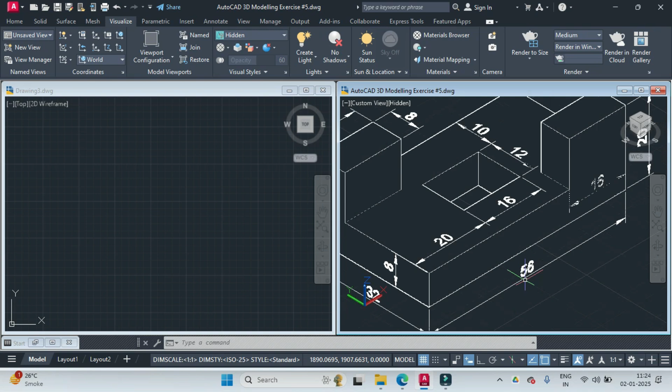So let me show you how we'll proceed with the rectangle. So first we'll draw a rectangle of 32 by 56 units. In the top view, we go to Home, select rectangle, and draw one rectangle. We give the length as 56 units and the breadth as 32 units and hit enter. So this is our rectangle.

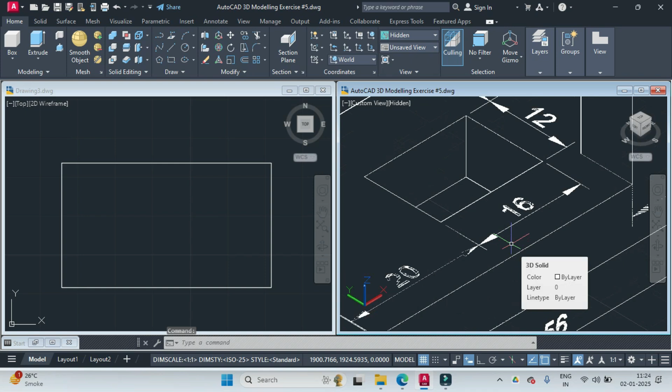Now we have to draw that inner small rectangle, and the dimensions for the inner small rectangle are 16 by 12. So again we use the rectangle command, and anywhere inside this we draw a rectangle of 16 units, press tab, 12 units, hit enter. Then we move it. We select the move command, click on the object to move, click on the center, and then move it to the geometric center of the upper big rectangle.

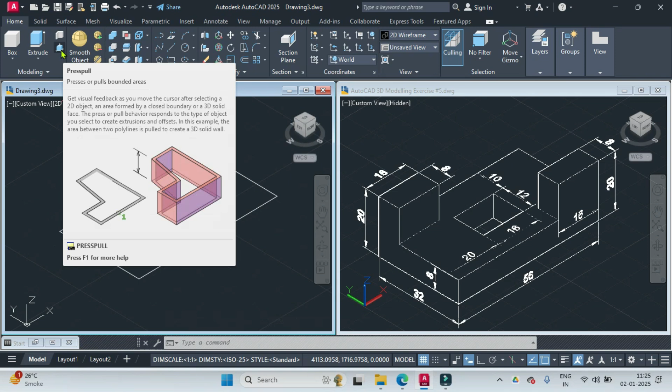Now we go into the southwest isometric view by clicking on this home icon. Now, using the press pull feature of AutoCAD, we are going to give it a thickness of 8 units. So first we'll click on this 2D wireframe and select shaded with edges, and then use the press pull feature, click over here, give a thickness of 8 units and hit enter.

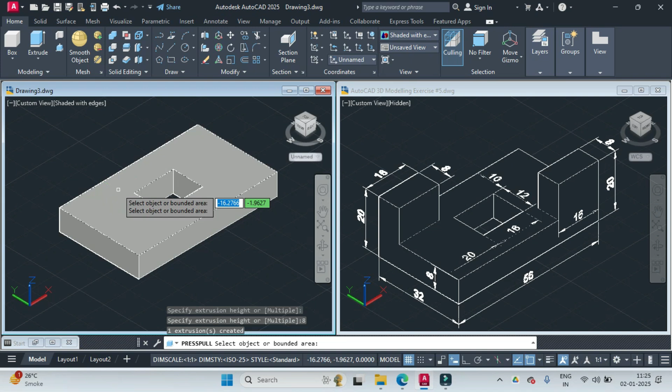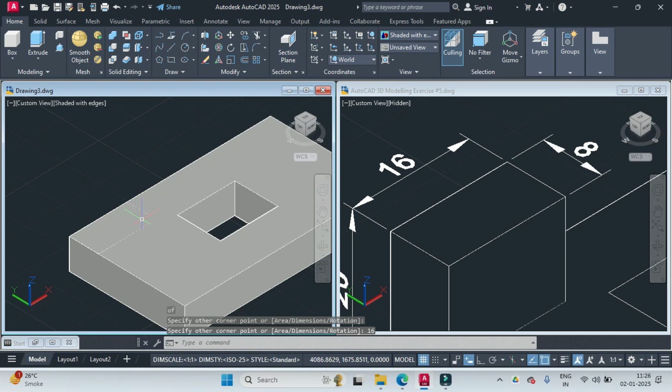Now we'll draw this upper rectangle which is 16 units by 8 units, and we'll draw that in this area over here. So again we use the rectangle command and click over here. You can type end, so you go to the proper end of this rectangle, and now you can give the distance for the rectangle. So we want it 8, we press tab, and 16 and hit enter. So the rectangle is now ready.

Now we have to extrude it to a distance of 20 minus 8, that is 12 units. So we use the extrude command, and here you can type L, so it selects the last object, and then we give a thickness of 12 units.

And now we have to copy this object over here. So CO for copy. We click on the object to copy, click on the base point. So we select end point, click over here and move it to the end point over here. Then press escape and our geometry is now complete.

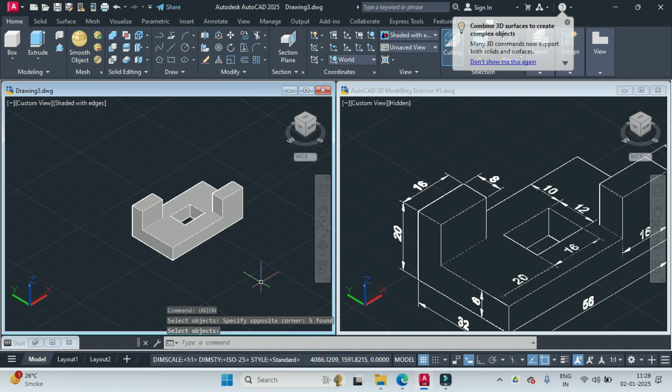Now we'll select all the objects like this, and utilizing the union command of AutoCAD, we'll make them into one, and our geometry is now complete. So friends, in this tutorial we have seen how to make this beautiful geometry in AutoCAD.